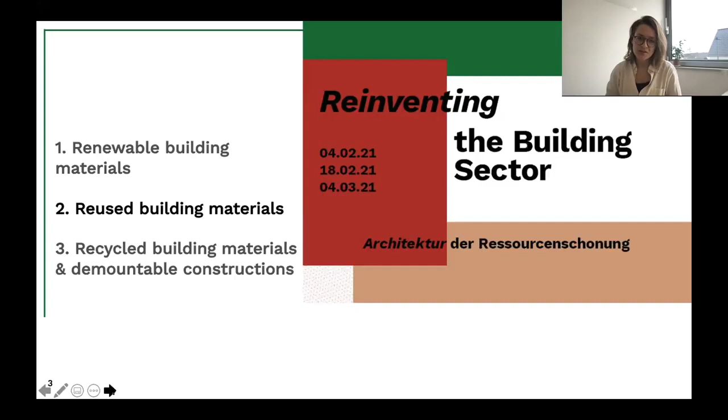In our last webinar two weeks ago, we focused on the topic of renewable building materials. Today we will switch to another, though equally important focus: the topic of circular economy and the reuse of building materials. Our built environment is increasingly seen as a source of secondary raw materials, which can be reused and then bring to life new constructions. In this sphere there is great potential which can be used. In our webinar today, we will learn about three buildings whose planners took note of this potential and consequently put it into practice.

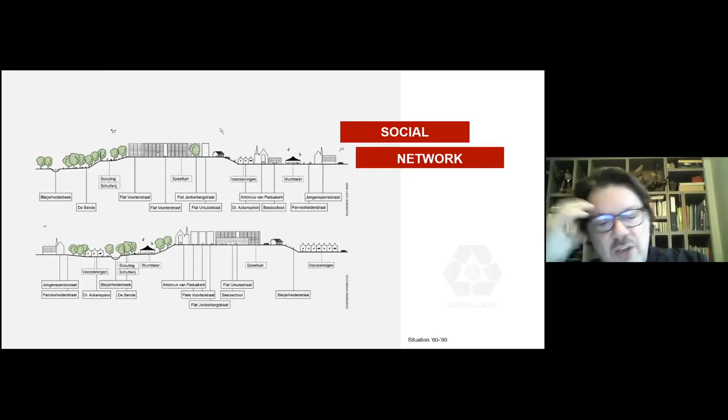After that, several social changes took place. Families got smaller, there were increasing single parents, and a lot of unemployment. The practice of social housing changed and residents felt less involved. The social networks and amenities disappeared over time.

In addition, the architectural condition of the flats deteriorated considerably. Concrete parts were falling off due to the rusty reinforcement, and the galleries and balconies on the flats had to be propped up at some point. The decision was taken to demolish 4 flats, counting 100 apartments each. This was a responsible choice, partly due to the fact that there was no population growth in Kerkrade anymore. For the first time, there was serious demographic shrinkage, and therefore homes had to be withdrawn from the market.

The first flat was demolished with the aim of building new but much fewer houses. This stirred emotions among the residents, who felt very connected to the flats. It became clear that the project needed to be handled more carefully. Perhaps it was better to find out which values could be retained.

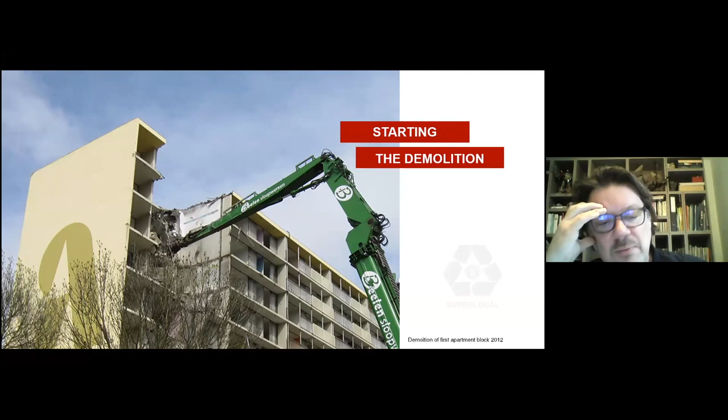The social networks that still exist, for example, are very valuable. How could this be maintained? There was an ambition to recycle as many existing local values as possible, including materials. And so the title for the project was born: Superlocal.

Mauer United Architects devised a circular process triangle for the Superlocal project based on multi-annual phasing, with the initiative in 2014 and planned completion in 2021. Instead of a fast, more, and global approach, we chose a slow, less, and local philosophy.

Here you can see the different phases of the project, and we are now in the phase of creation, close to completion. The year 2021 is the presentation year of the Internationale Bauausstellung Parkstad Limburg, and Superlocal was submitted as a project and eventually became a key project within the IBA.

We started the project by making a thorough, precise inventory of all the values in the area. The former and partly remaining residents were interviewed. This allowed us to put together an evaluation of the archetype gallery flat in use during the period from 1968 to 2018. But many other indexations were also made, such as the construction materials, landscape, floor plans, and more.

All these findings have had substantial influence in developing the new plans. In this way, the modernist archetype has been evaluated from the inside out. The findings were all summarized in the so-called neighbors book entitled 'Iedereen voelt zich daar thuis,' which is Bleijerheide dialect for 'everyone felt at home there.'

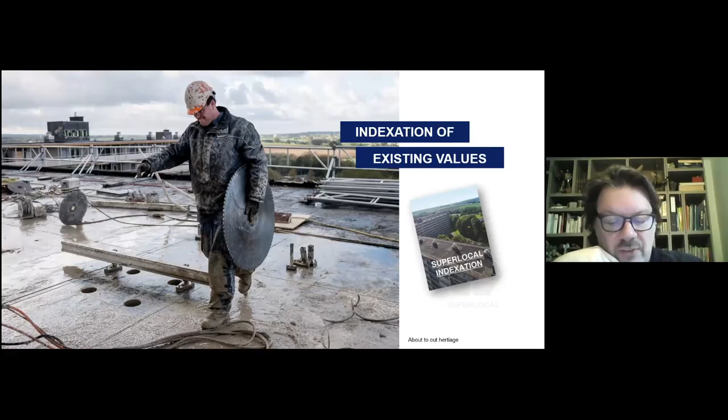The superlocal process was set up to conduct experiments in the fields of circular building. For example, concrete elements from the existing flat were sawn and relocated to investigate whether they could be reused. The demolition firm went so far as to cut out entire building blocks with walls and floors and hoist them with a crane out of the existing flat. This was actually revolutionary for construction practice.

As an experiment, a complete house was built from the harvested materials. The intention was to use only recycled elements from the flat. No new elements were allowed to be added. The aim of the experiment was to find out what problems would be encountered. And there were many, particularly in the area of regulation rules.

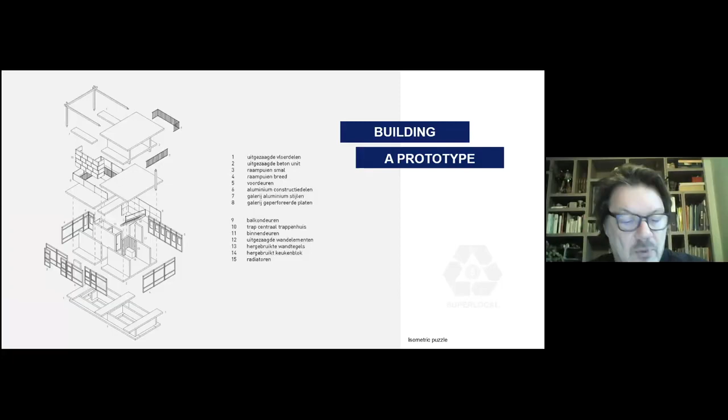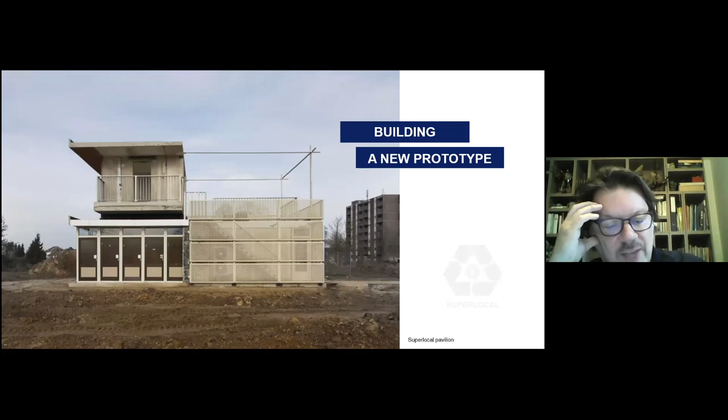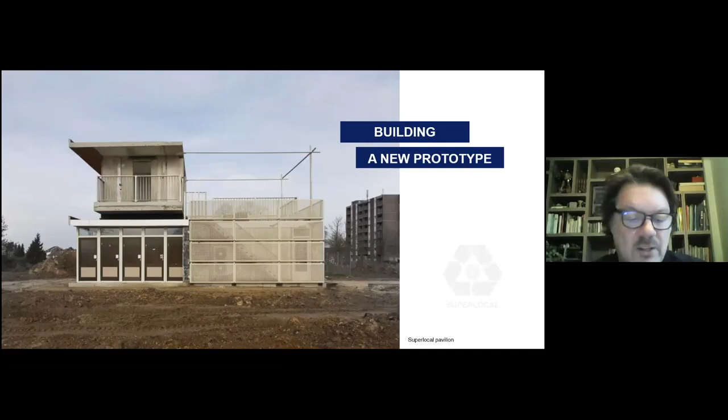It became also clear that in subsequent circular buildings, in the field of installations, insulation, and finishing materials, new elements will eventually have to be added. Today, the experimental building serves as an information pavilion for the project. The unique approach of superlocal was awarded the Dutch Building Prize already in 2019.

In the meantime, the demolition firm has managed to regrind the concrete that is released from the demolition. This results in new mining hills on the demolition and construction site. The material is extracted from the existing flats. The concrete is mixed on site and used for construction of new infrastructure and homes.

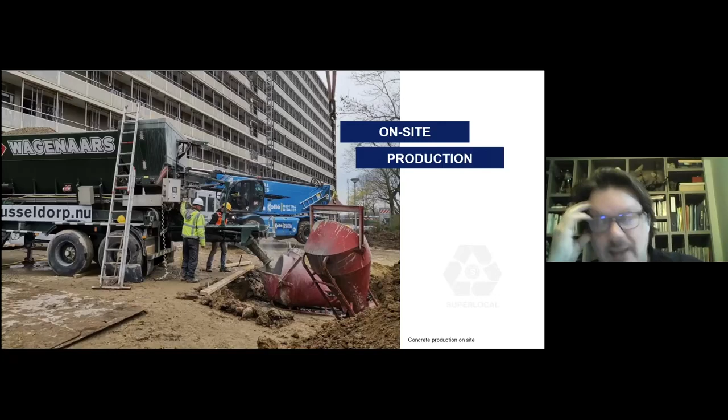Kerkrade is pioneering here again as before. From the first coal mine in Europe, a long way has been traveled towards the first recycling concrete mine, an important step for the future.

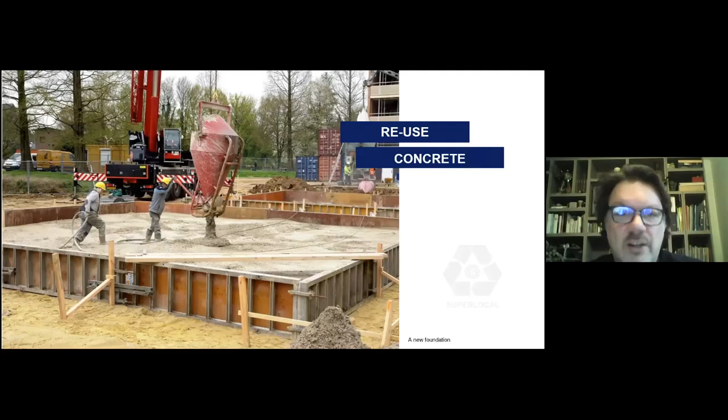Different experimental building sites attract many visitors to the superlocal area. You can see some examples. There were a lot of gatherings at the Info Pavilion and also on the different demolition phases.

All the knowledge gained from the superlocal project is used to realize new social housing. This is reflected in a new gallery flat on site. The flat has 140 dwellings. Instead of identical dwellings, it has been chosen to integrate different types of housing and amenities, allowing different target groups to be better served and creating a mix of residents.

Different types of durability are also applied in the flat. Half of the flat has not been demolished, but stripped to its concrete structure. The construction is reused and provides the structure for 50 new homes.

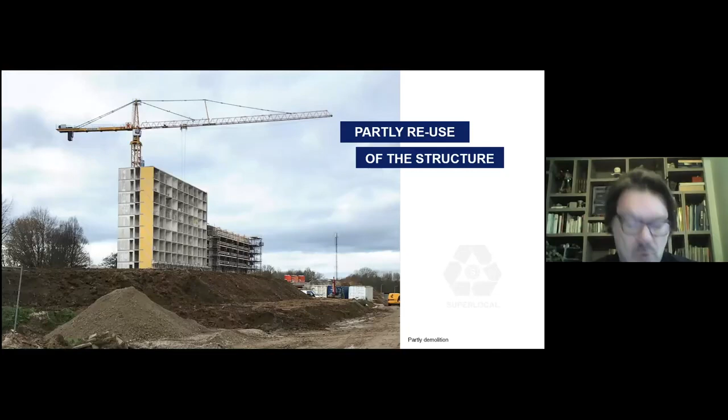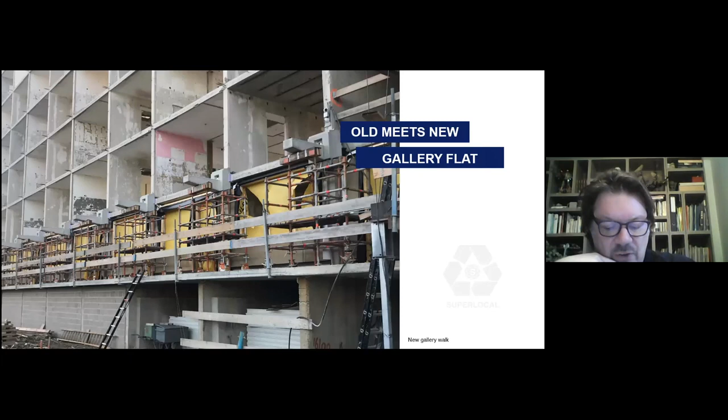Secondly, in the extension of the flat, concrete from the demolished flats was reused according to the principle of regrinding. And thirdly, applying new materials, the architectural details are constructed in such a way that they are reversible. A fine example is the brick facade of the plinth ground floor of the flat, which uses no mortar but is dry stacked.

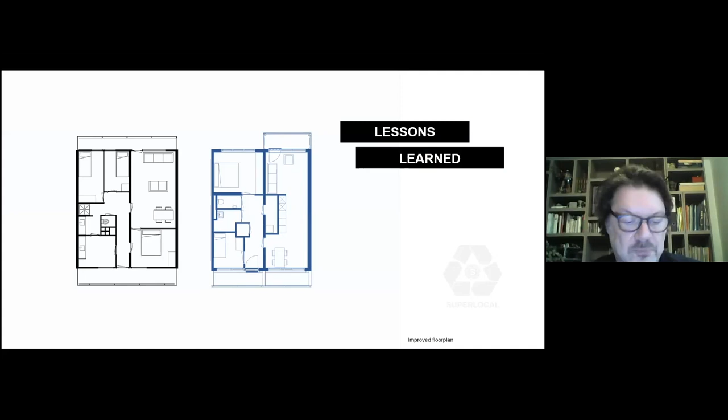We chose to hold on to the building type gallery flat. We improved apartments in the existing structure according to the given input by the former residents from the neighbor's book. As mentioned, we also added new floor plans and types in the new built half of the gallery flat.

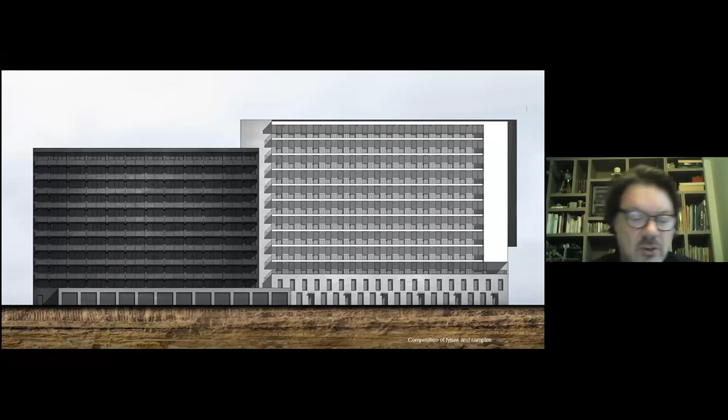The galleries are situated on the north side at the ground floor of the left lower half of the flat. Instead of the usual storage rooms, social functions were planned, a place where inhabitants can meet and come together.

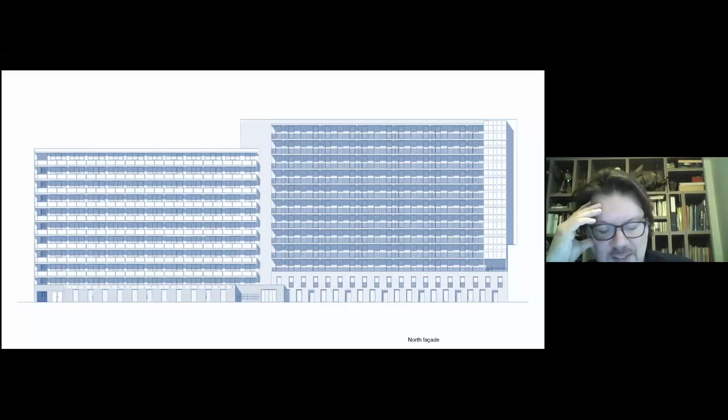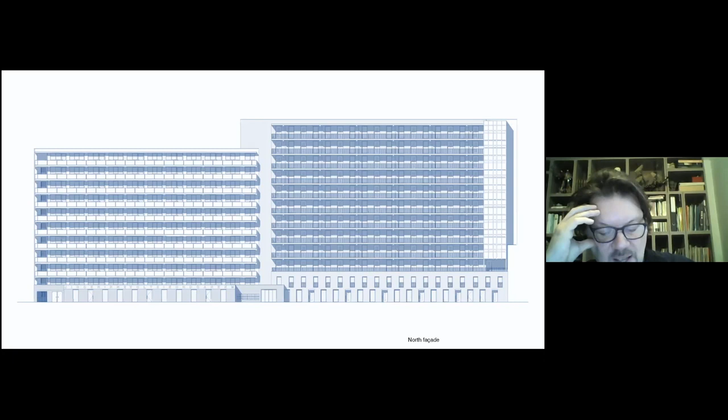This responds to the social change that has been taking place since 1968: fewer families, but more need for social networking. In the plinth of the right half of the flat, terraced houses with own front doors were realized. All this gives the ground floor of the building a more lively character.

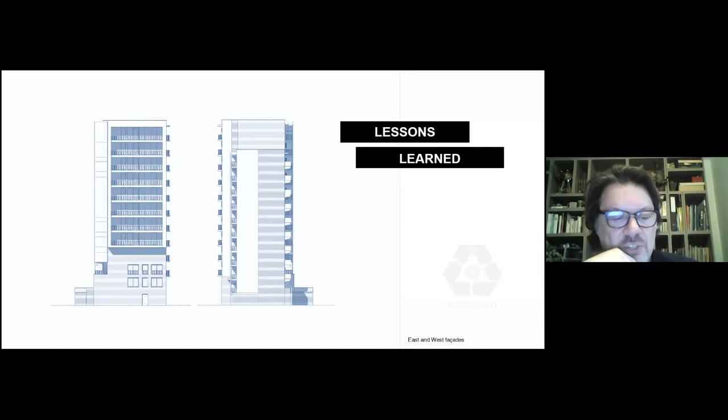On the west, apartments were planned that introduce a whole new view towards the municipalities of Heerlen and Landgraaf. With its height, concept and position, the building forms a new icon for the Parkstad-Limburg region. Here you see some important buildings of Kerkrade, and the superlocal flat is just a new icon in the row.

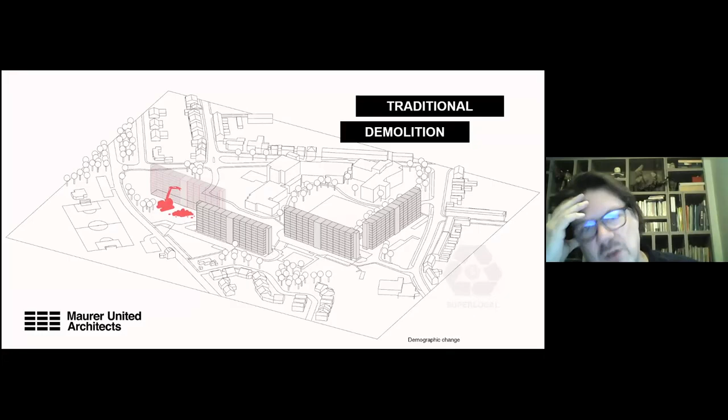I want to end this presentation by summarizing the superlocal project in 5 steps. At first, the first apartment block was demolished in a traditional way, and we found out that this is not the right way to do this, because we want to get more the involvement of the former residents in the project.

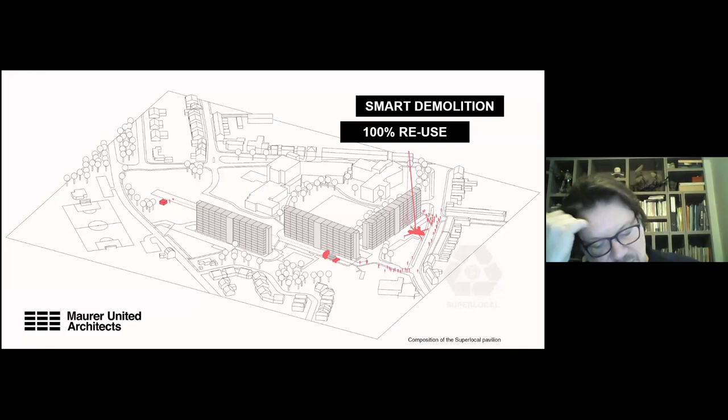So the second apartment block was demolished in an innovative and daring way. The cut-out segments were moved to another spot on the superlocal area, and the pavilion of 100% reused materials was realized.

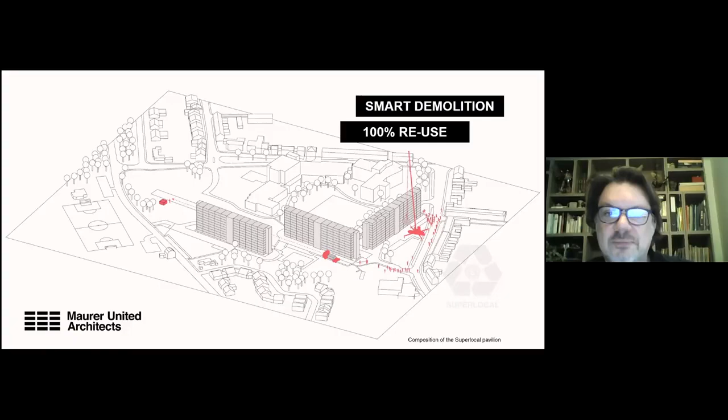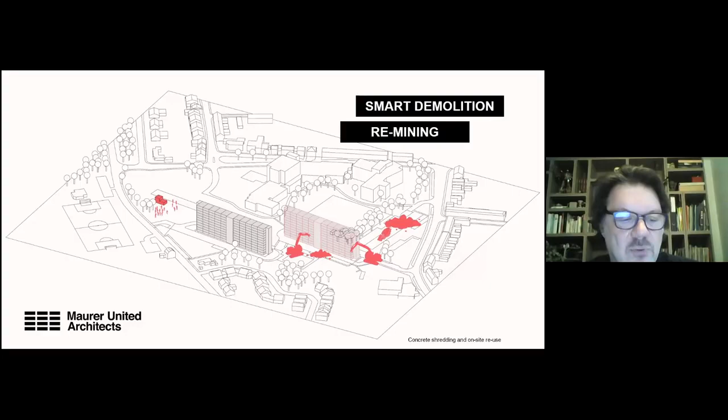The third apartment block was demolished in another way. The concrete was shredded on site for producing new concrete. And then 3 plus 15 new experimental houses were built. Different circular building methods were tested. Half of the fourth apartment block was demolished, the other half was stripped.

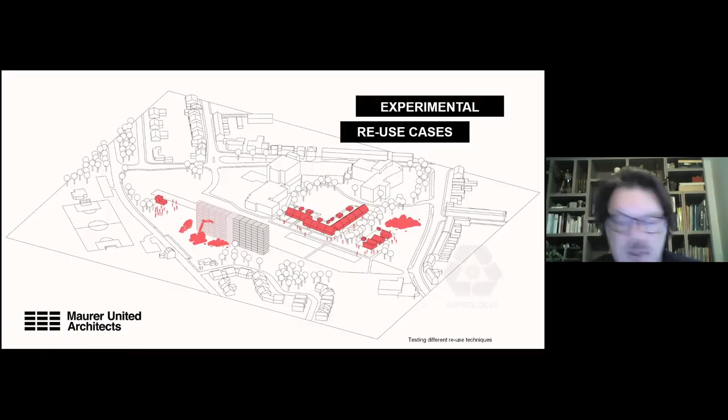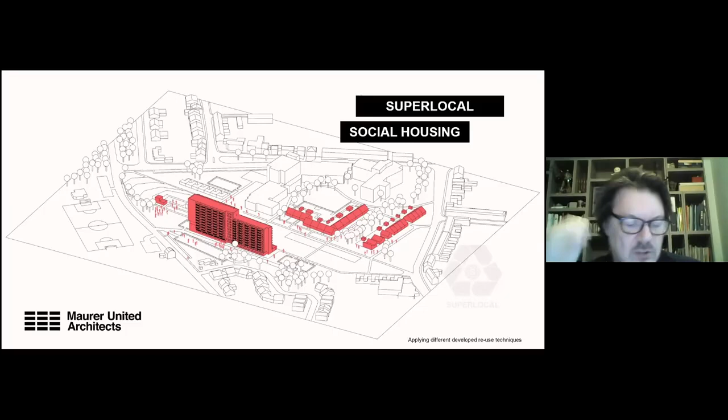The different tested techniques will all be applied in the realization of the redeveloped gallery flat. In total, 400 social housing units were reduced to 130 new housing units. To finish the superlocal project, all the water in the area will be collected, cleaned and reused on site. The United Nations Global Goals 2030 call for local targets.

In Kerkrade, we have tackled this in a superlocal way. With the help of social research and technological innovation, a number of these objectives are met to the maximum. The project is now in the realization phase and will be put into use during the IBA exhibition year 2021. Thank you very much.

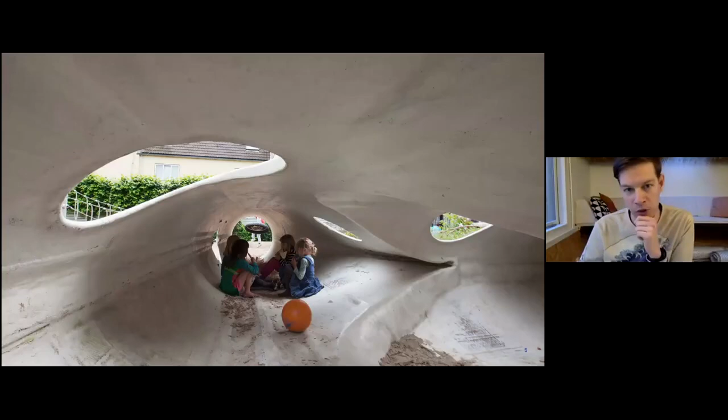Besides our office in Rotterdam and Amsterdam, we have an office in Beijing, China, and one of the founders, Césare Peeren, started Superuse on site to work on projects in close collaboration with the client. At Superuse, we design and develop on available surplus, reusable materials and waste. Superuse builds and designs innovative, aesthetic and inspiring environments, buildings and interiors. We create value by creating quality architecture while preventing the destruction of resources.

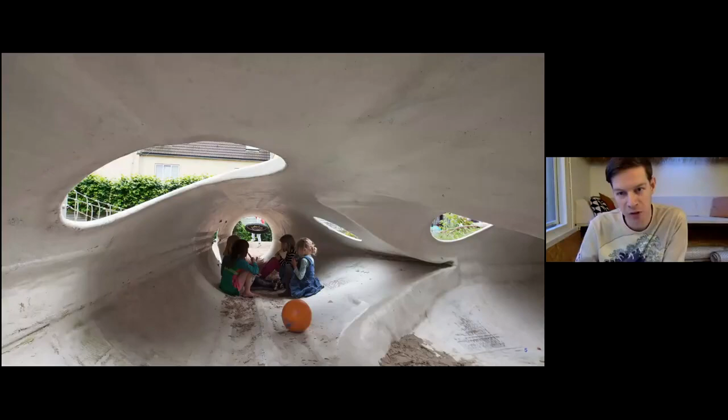Do you have any idea what these kids are playing in? This is the inside of a windmill blade that we used in one of our playgrounds. Our approach results in a smaller footprint compared to a regular building process and shortens and optimizes the flow in material cycles. In this case, carbon emissions are reduced by more than 90%. The picture was taken inside the long blade in a playground in Rotterdam, made out of 5 rotor blades.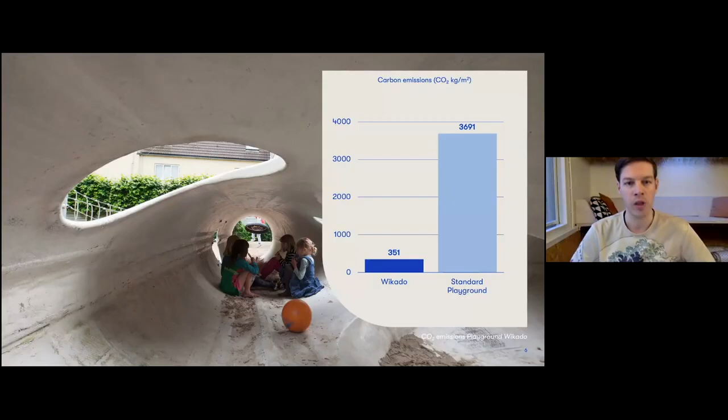I'm not going to elaborate on this, maybe another time. Today I will show our philosophy by taking you on a digital field trip to two of our projects located along the German border: Villa Welpeloo in Enschede and Kringloop Zuid in Maastricht. I hope you will be able to visit these buildings soon, but for now I'll take this opportunity to show some things that a physical visit cannot offer.

First of all, Villa Welpeloo, a modern house for an art collecting couple. Villa Welpeloo is located on the north side of Enschede, which is actually the city in which I grew up. The neighborhood where the villa is located was struck by a disaster in 2000 when a fireworks factory exploded. The urban plan of Pi de Bruijn provided space for the old inhabitants, who were mostly working class, but also new plots for people that wanted to build their own house.

The clients acquired one of these sites and approached Jan Jongert of 2012 Architects, now called Superuse, to design a house out of waste materials. This is what you see when you go to the house today. The outside doesn't reveal in any way that roughly 60% of the materials used would have ended up in landfill or incineration plants.

Let's take a closer look at some of these materials. I'll show you where they come from and how they are used to create our kind of architecture. It is a modern house with big glass surfaces. On a sunny day, the inhabitants can close their curtains to prevent the house from heating up too much.

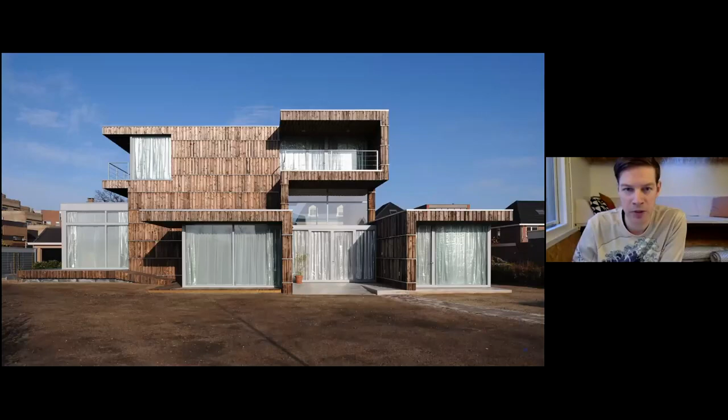But these curtains are not normally found in regular houses. They are more common in glass houses, where they filter the light to protect the plants. The north side of the house is relatively closed to prevent heat loss and contains most of the storage areas, like the garage. On the upper floor, the long closed wall on this side is one big bookshelf.

The top floor has 2 bedrooms, each with a bathroom. Laundry has to be done on the ground floor, so a clothing shaft connects the top floor to the ground floor. You can throw your dirty clothes in here and they end up next to your washing machine. When you take the stair in the morning, you end up in the kitchen and working area. That's where we go now.

All fixed furniture has been custom made and designed mostly out of waste materials. These desks provide plenty of space and the windows facing southwest give daylight for sewing and other hobbies. In the kitchen, the origin of the material is visible. Let's take a closer look.

All wooden cabinets are made from building advertisement boards. This is waterproof multiplex and usually has been standing outside for months, but becomes redundant when a project is finished. We harvested these multiplex sheets and collected them for the furniture maker.

Going down the steps takes you to the living room and gallery. The owners love to support young artists by collecting their work and showing it in their living room, which sometimes doubles as a gallery for semi-private showings. The door that leads to the room in front of you is the guest room, located on the ground floor, and it has its own exit outside.

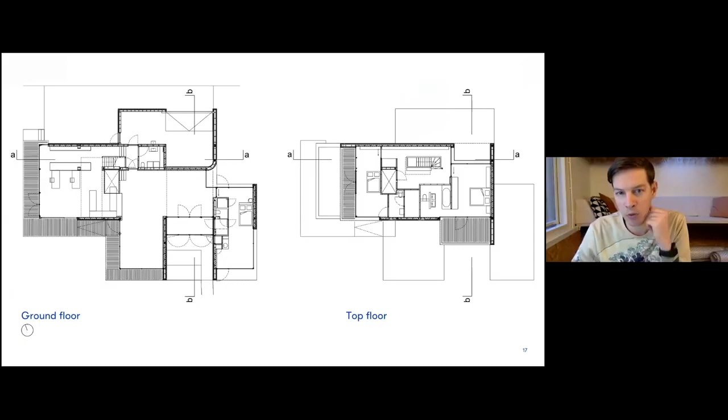Let's take a closer look at the floor plans. You can see the ground floor on the left and the top floor on the right. It shows that all rooms have their own bathroom with toilet and shower, even the guest room. It's perfect for having your children or grandchildren over for a visit. It may seem that the bathrooms are hidden behind the closed facade, but there is some daylight.

As you can see on the right, there is light coming through the facade. Some of the cable reel slats have been left out to add a window for daylight and natural ventilation.

The bathroom next to the master bedroom is also made out of waste materials. It looks a little like black natural stone, but actually it is a panel made from plastic packaging by Smile Plastics. This pattern is called charcoal.

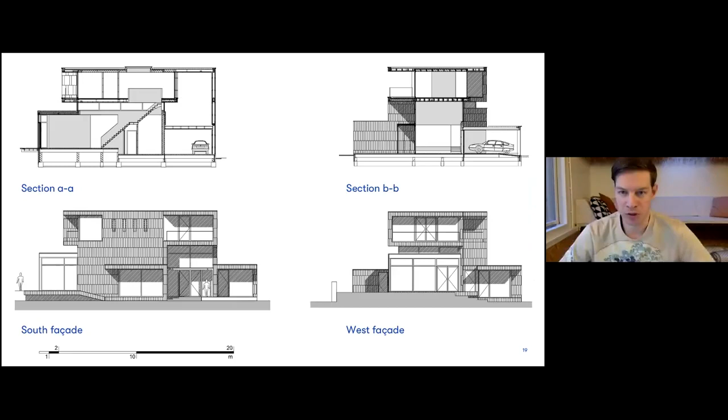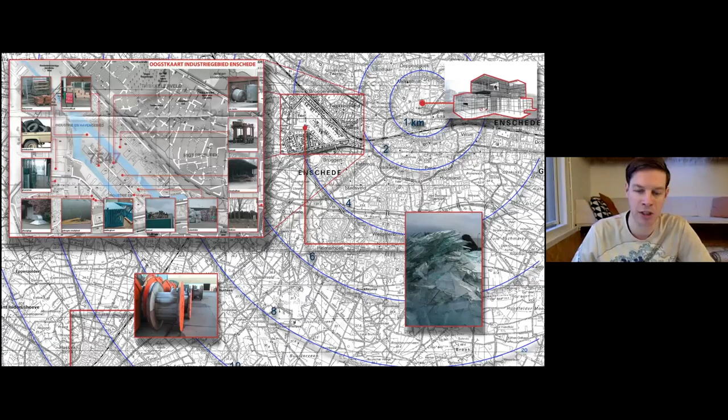They provided all the wood for the facade cladding. The core of the cable reel has been harvested, while the wheels stay behind at the source as waste. They are usually too damaged in the process.

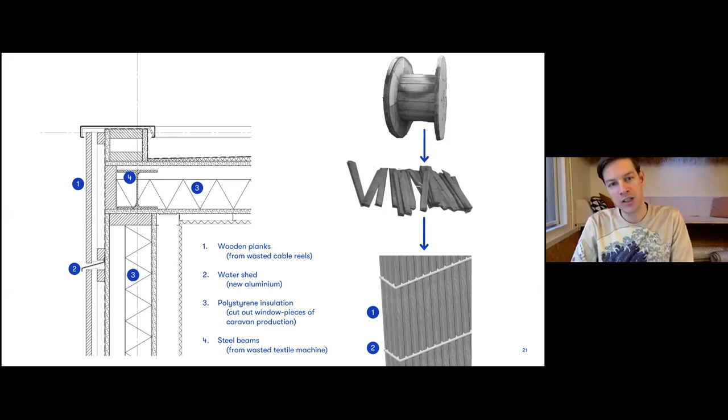The slats of the core are treated to increase the lifespan of the spruce. This is done with a process called Platonizing, where the wood is heated up to 170 degrees Celsius to remove most of the liquids. Afterwards, it has to dry carefully before receiving another treatment that is similar to baking.

In the detailing, we defined clear volumes where the cladding is going around all surfaces, using the cable reels that we found. Using this wood, in comparison to new wood, saved over 90% on carbon emissions for the cladding.

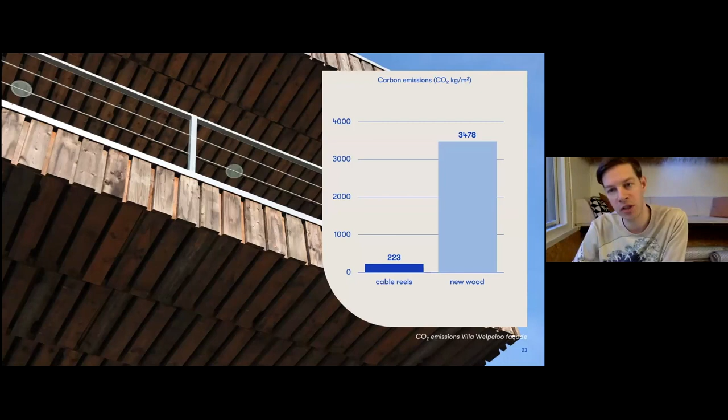For the steel structure, we harvested an old textile machine. Enschede used to have a big textile industry until the 1970s. When the factories closed and production moved to other countries, the machines ended up at scrap iron companies.

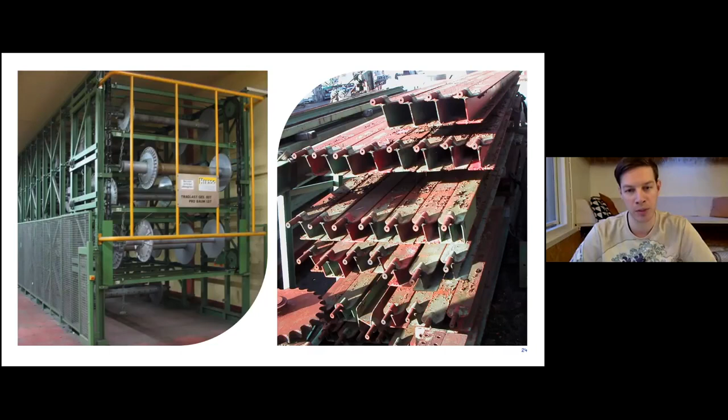We managed to find one of these machines and have been able to make over 90% of the steel structure out of this machine. It's an interesting fact that in this area used to be a textile factory, and that after almost half a century, remnants of that industrial past end up in a private house like this.

In the finished building, most of that history has been hidden by insulation, cladding and wall finishes, but the bracing is still visible in the finished house. As you can see here, it has been painted silver to illustrate the rich history that is behind the structure.

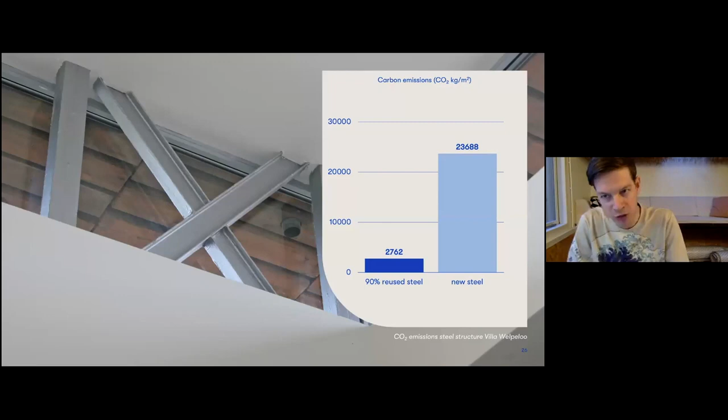Reusing the steel structure saved almost 90% on carbon emissions compared to a new structure.

I'd like to show you a 2-minute video that Al Jazeera made in 2012, interviewing the owners of the house.

2012's most ambitious project to date is the Villa Welpeloo, a temple to super use and the first project of its kind. But having a home built almost entirely out of waste didn't faze the clients. Because they were very serious architects, and I thought there should come something beautiful out of it.

The work of the carpenter, this wood, is all reused. Colorful - so what, billboards that you would see just on the side of the road? The whole house is made from an iron construction, and these are parts of an old textile machine. Earlier, this area was famous for its textiles, fabrics. So a lot of textile machines are still there unused. And they make it from the cable spools.

Now your neighbors, they're not talking? Did you see her? She lives in a house made out of rubbish. Oh, my goodness. I'm proud of it.

There must have been some problems along the way when you're building a house out of waste materials. Of course there were some problems. The first day, let me be honest, the first day I came in the house, I thought, why didn't they paint this side from the cupboards? They see that it is renewed. They should have painted it. Oh, from the billboard. Yeah, from the billboards. And now I'm so happy that you see the real billboards.

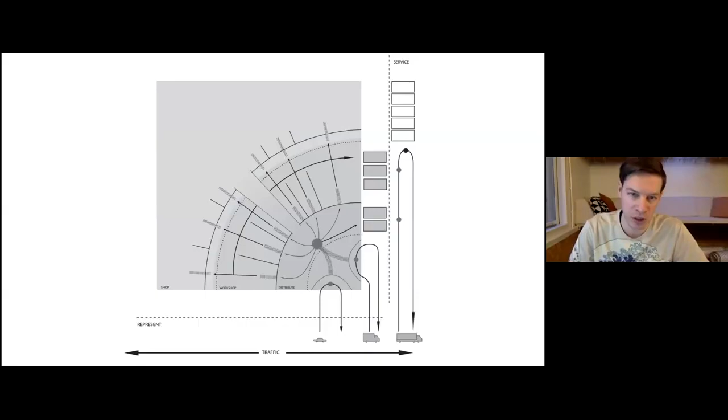The concept we made was a gradual transition of services inside the store. In one corner, the goods are dropped and distributed to several workshops. In the workshop, a selection is made of which clothes are shop-worthy and what goes to textile recycling. The same goes for furniture, appliances, and so forth. Finally, the inspected items are priced and end up in the shop.

What we've finally been able to make functions in the same way, although it's a bit more modest in its graphic language. The building itself is a pretty simple rectangular box. In the front is plenty of parking space, and the bottom right corner with the rotor blade is the place where people can drop off their second-hand goods.

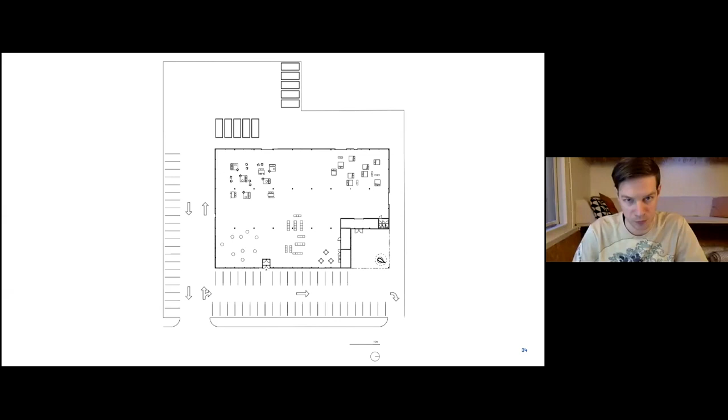As you can see here, most of the front facade is glazed. Visitors arrive at the entrance in the middle, marked by the tip of the rotor blade that shows opening hours and such. This facade faces east and allows the morning sun to enter deep into the building to heat the inside air a little.

The south side is also pretty open, while the north and west sides are more closed. The back of the terrain has containers for the goods that don't make it to the shop and become waste. In developing the building, we used a harvest map to gather the materials we needed.

While the structure is a simple steel structure, designed for disassembly, the materials for the facades are second-hand. After Villa Welpeloo, we developed the harvest map into an online platform accessible to everyone. It's a marketplace for professional upcyclers. Recently we transferred ownership of the platform to New Horizon, who have urban mining as their core business. We still use the platform while we focus more on our core business of architecture.

Let's take a closer look at the material we used in Kringloop Zuid. We came across these metal profile sheets that are common in business districts like the one Kringloop Zuid is located in. The factory usually produces more of one color than a buyer needs, so this overproduction can be up to 4,000 square meters per month, which provided us with the ability to select what would be perfect for us.

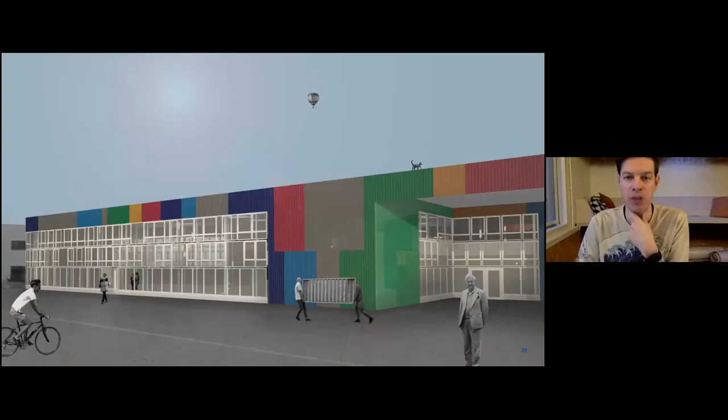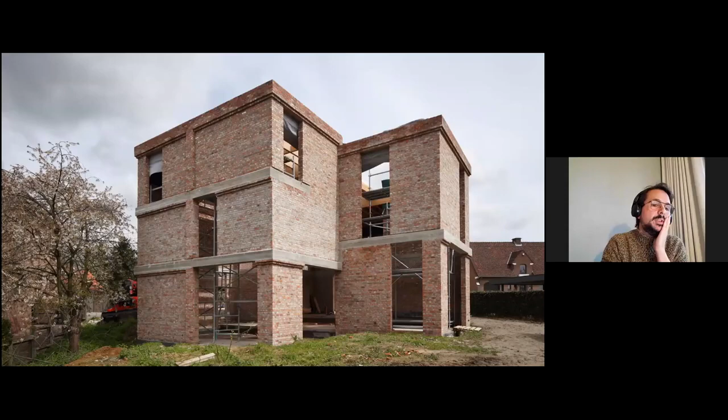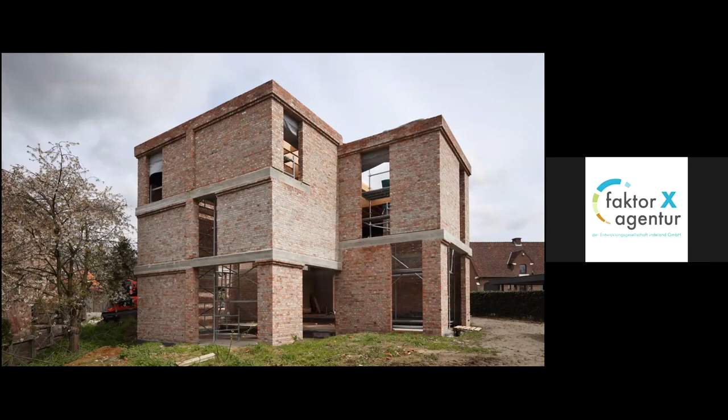My name is Lieve Nys, and I'm here to share with you some experiences with the use of reclaimed building materials by means of our DNA House, which was completed 8 years ago already in 2013. The fact that we are still talking about this house today, I believe, is somehow a stimulus to keep pioneering, but it also shows that architecture is a slow medium and that producing knowledge through practice takes time anyhow. I will also try to situate the importance of this DNA House for our approach on circular construction, which is of course about more than reusing bricks.

Blaaf is turning 18 this year, so we will finally be grown-ups. Last year's Flanders Architectural Yearbook featured Blaaf in an article called The Researching Practice, which is a title with a double meaning: the searching practice, as in how we have always asked ourselves what our role as architects for society could be, and the researching practice, as in how we have always combined our engagement with intuition and research as the basic information system for our designs. Our research so far being mainly practice and education based.

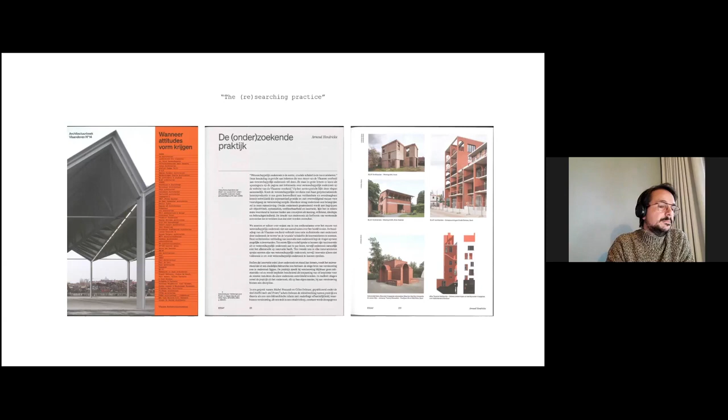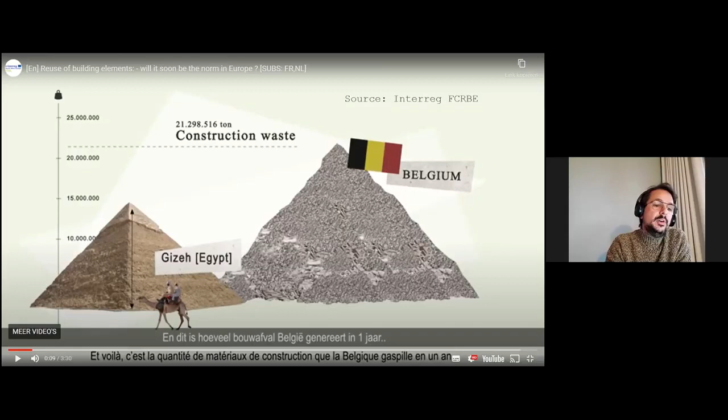Construction waste is an important urgency in Belgium as much as in any other country. This is a screenshot from a video by the Interreg program called Facilitating the Circulation of Reclaimed Building Elements, based on research by, among others, the Brussels-based office Rotor. It states that Belgium produces over 21 million tons of construction waste each year, a number which is unfortunately still growing. It also states that in history, the economic feasibility of internalizing the cost of reclaiming materials has always been evident.

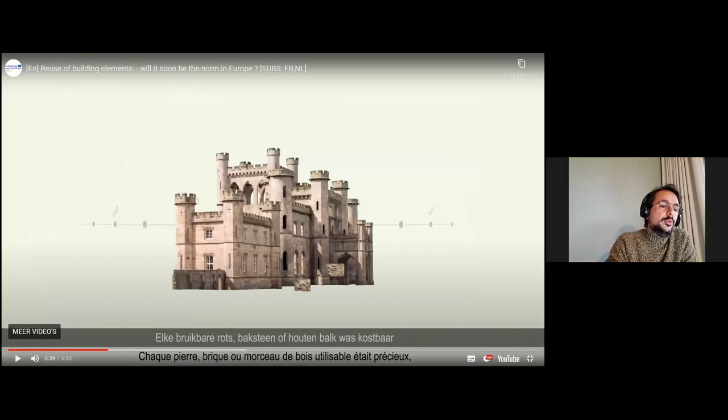It is only since the second half of the 20th century that we have started to grow bad habits. The growth of global consumerism and the shift from expensive materials and cheap labor to cheap materials and expensive labor have somehow led to the externalization of both the impact and the cost of materials and waste. Therefore, the importance of the life cycle analysis approach of construction materials is that it maps both internal and external costs and impact of construction materials, the so-called shadow price. In the lowlands, the Dutch NIBE classification of materials has been a forerunner for many years. Flanders has only recently developed a similar tool called Totem, which is currently being implemented.

If we look at facade brick, according to NIBE, it is class 1C. To give you an idea, in comparison to that, facade cladding in FSC certified tropical wood, fiber cement, or metal are all in class 3 or 4.

The main reason for the excellent performance of brick is, of course, the lifespan or durability of the material, but also in terms of the LCA shadow price. It's interesting to notice that brick has low water impact, low resource impact, low land use impact, low toxicity, low maintenance impact, and low waste impact. The downsides of brick are mainly situated in the production process, while the baking process itself is energy consuming, and it stands for 50% of the CO2 release and for 80% of the total LCA shadow price.

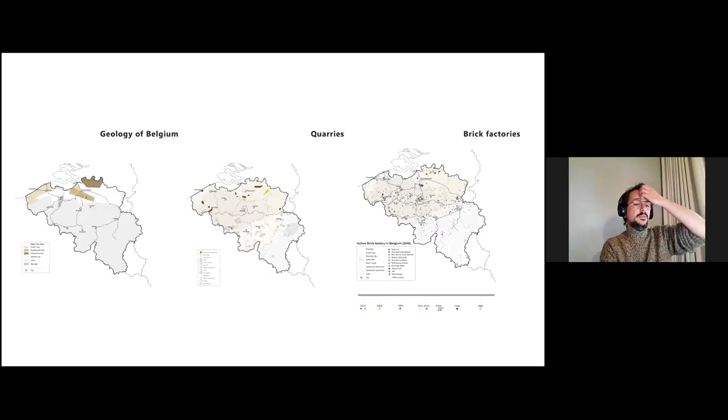As you may know, Belgium, Flanders in particular, is a brick region. On the first map, you can see the geological areas that provide the resources. The second map shows all different excavation activities on the territory. Very often clay is the byproduct of other excavations. And the third map shows the location of brick factories through time. Flanders has an economy in brick production since the 13th century, in which our river network played an important role.

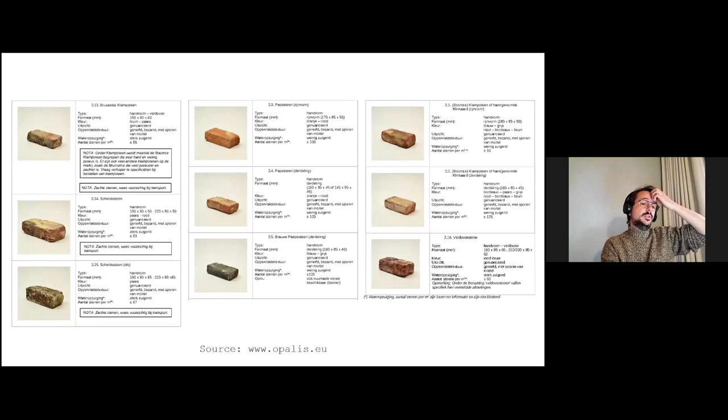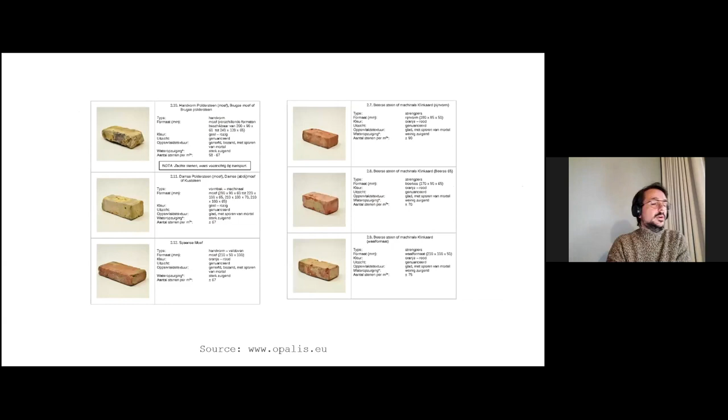This is an overview of available reclaimed bricks on the market today. You can see a variety in modules and textures depending on the production process, and different colors, mainly yellow and red, because they are made out of local clay depending on the type of clay. All these bricks were reclaimed from deconstruction works and cleaned by hand.

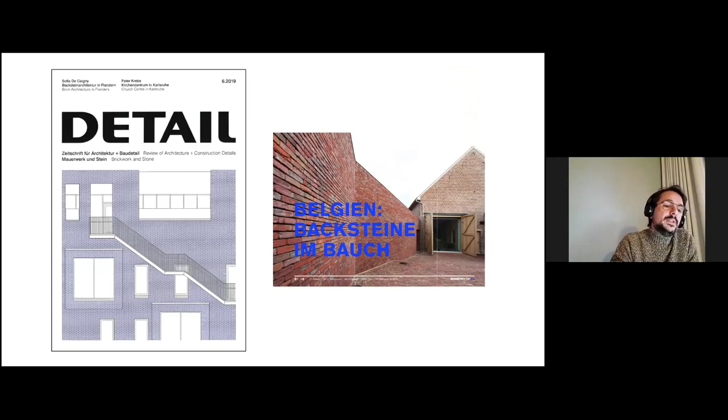Movements like these have contributed to the installation of the generic image of the brick fermette house in our built environment. It is the omnipresence of brick and the way it is intertwined with our fiscality, economy, and building culture that also contribute to the image of contemporary brick architecture as a product of poetics and craftsmanship. Even internationally, German magazines like Detail and Baunetzwoche, for instance, have recently elaborated on Belgian brick architecture and Baukultur.

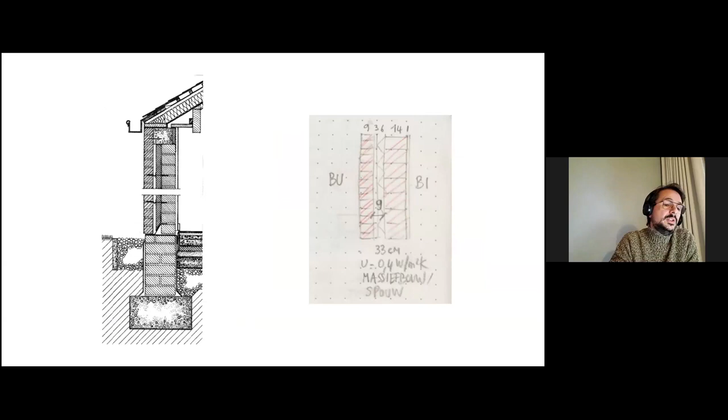10 years ago, in 2010, it was still common practice to build 33 centimeter thick cavity wall constructions with 6 centimeters of insulation and 3 centimeters of ventilated cavity space. These were interesting times because since 2006 we had EPB, energy performance regulations, and at BLAF we were already engaged in studying the passive house concept.

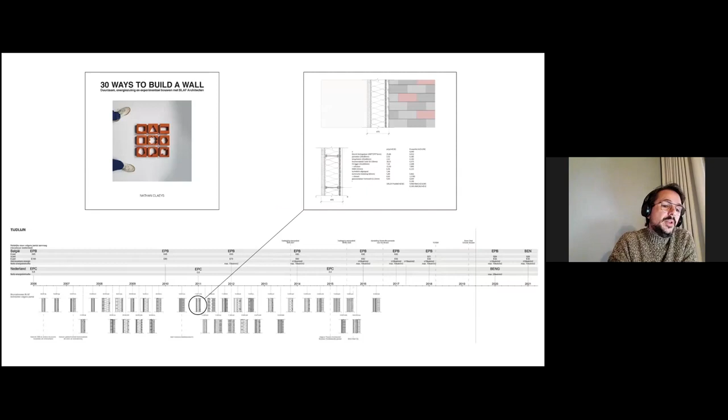Here you can see a timeline from the master thesis, 30 Ways to Build a Wall, which gives a chronological overview of 30 different wall compositions that BLAF built in private houses between 2006 and 2016, with detailed information about the materials and their performance, but also about the construction cost.

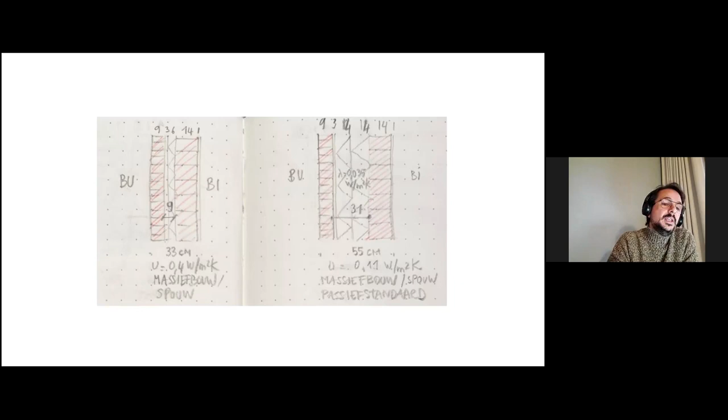So somewhere along the line, we were suddenly confronted with this contradiction. The 2010 cavity wall with a 9 centimeter cavity became a passive house cavity wall with a 31 centimeter cavity space. Now, in the construction of the cavity wall, we are dependent on quite a lot of secondary structural elements to stabilize and carry the outer leaf of the wall.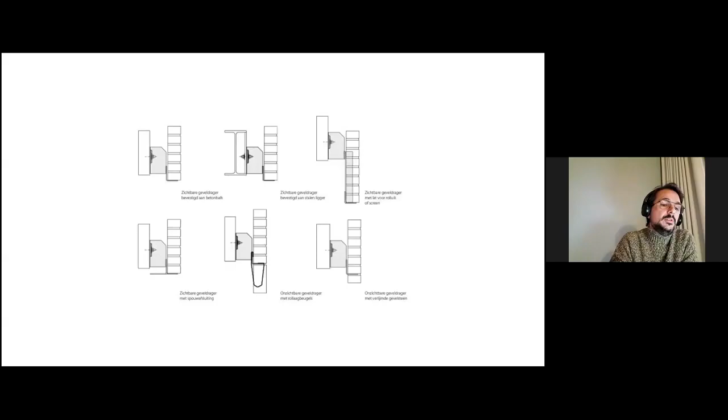Anchors and facade carriers like these simply don't make sense if you have to bridge a 20 to 30 centimeter cavity. Moreover, for sustainability reasons, we were shifting away from rigid petroleum-based insulation panels to softer ecological insulation materials that are unable to take any pressure.

Bridging these large cavity gaps makes construction more expensive, complex, and error-prone. Or try to find an efficient way to make these slabs fit around these anchors.

Maybe you are familiar with Florian Nagler's research, Einfach Bauen at the TU München, that starts from the same observation that building according to contemporary standards has become ridiculously complex and almost impracticable. The logical result of this is that brick is losing ground as a facade material.

This later became evident in 2015 when this book was released. It is a review of 10 years of passive house construction within the Brussels capital region, and it contains only one building with brick facades, which is our DNA house.

So it was our observation that the EPB calibrated legitimizing of the appearance of architecture has big impact on our built environment, as well as on our role as designers. Or to put it in Rem Koolhaas' words, the architect is losing his grip on the facade to more competent disciplines.

What we see is that the industry reacts to this evolution by trying to make brickwork thinner and lighter, so you will either need more anchors to keep the stacked bricks upright, or you glue the material as wallpaper on top of something else.

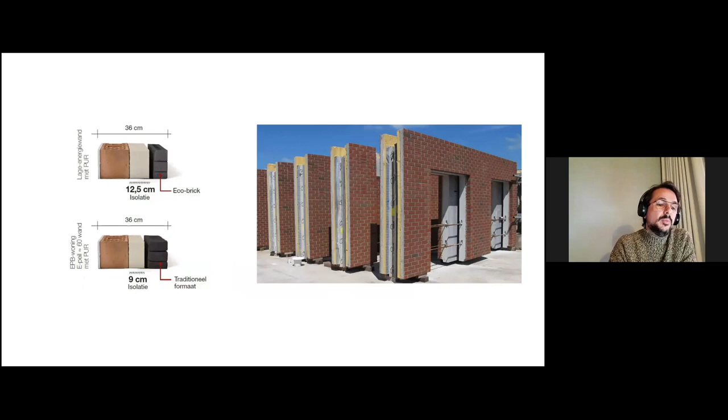For us, this feels like a counterintuitive evolution, not only because we were looking for a more circular approach of the construction than to glue everything together, but also because it takes us away from the basic properties of brick, often referred to as the agency of the material. A brick is a stacking module, but also a pixel in an image, a proportion system, and a representation of continuity, education, and labor.

So this is where the story of the DNA house comes in. Instead of making the brickwork thinner and lighter, we decided to explore the idea of making the brickwork thicker to make it structurally and thermally independent.

Inspiration can, of course, be found in pre-cavity wall constructions, where you see that the shell is highly valued and therefore preserved and stripped down to give it a new life from the inside. Like this image of the St. Elisabeths Hospital renovation in Washington.

What is equally interesting in this example is that the building is so big that the interior space can also be experienced as an exterior urban space. So this approach triggers a lot of design questions.

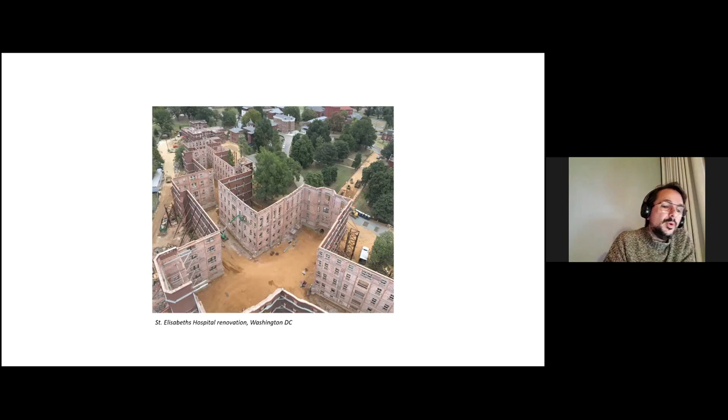The idea for the DNA house was to make a brick shell, a facade, as a long-term construction or a future ruin. Now, first of all, the commission for this house was quite standard, a building plot in the outskirts of Brussels, a home for a family.

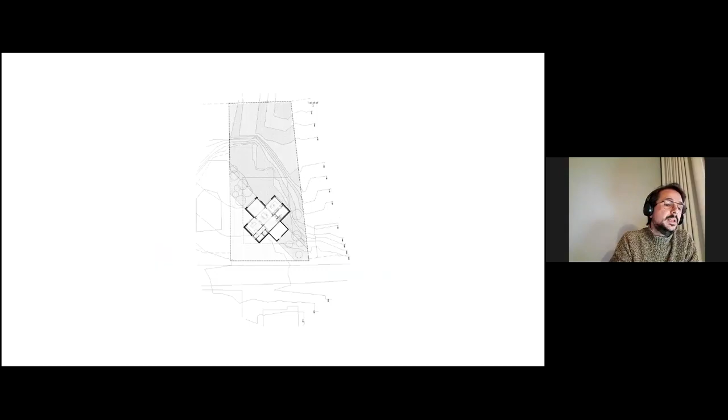The cross shape of the shell enables us to work with the topography, the orientation, and the planning context, and in itself is already quite stable in different directions.

Our experience from renovation projects was that the post-insulation of shells is often problematic and complex because of obstacles like structural embossments on the inside of the wall, or the construction knots where the floors are laid on the load-bearing walls. So to make sure that we would have no obstacles on the inside that would prevent us from post-insulating in an efficient way, we made the shell as flat as possible on the inside.

The shell is constructed in reclaimed machine bricks as a full stone wall construction to make it self-bearing, with a basic cross bond, which consists of alternating layers of stretchers and headers. So the brickwork has the same expression on both faces of the wall, which was important to us because we knew that parts of the shell would stay visible from the interior as we finished the house.

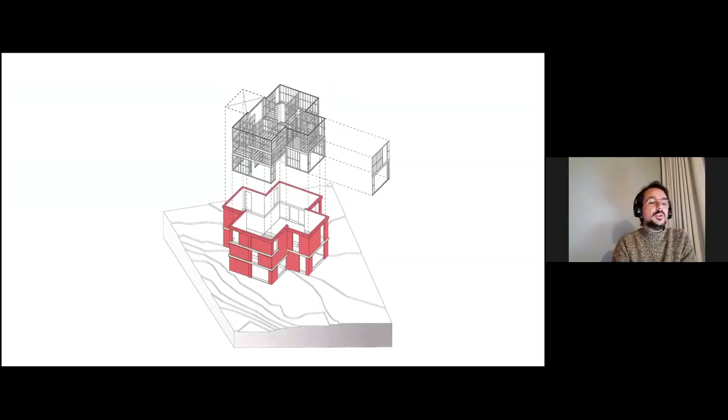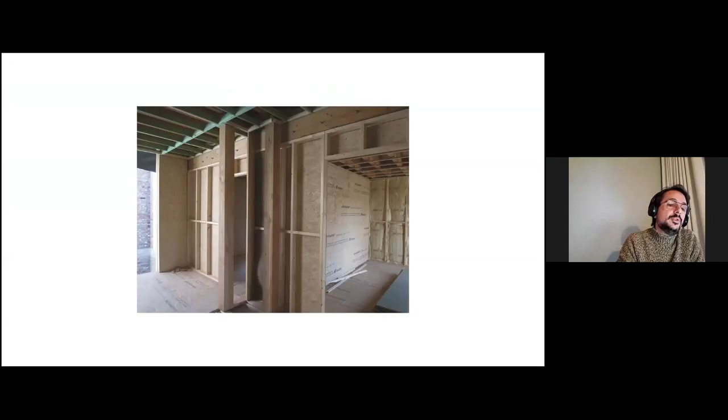This 3D detail section of the construction of the house shows you the whole principle of the construction, with the self-bearing full stone brick wall on the outside, the first layer of semi-rigid insulation perfectly fitting the flat inner surface, and the insulated timber frame behind it. You can also notice that the sections of the timber frame are very limited. This is made possible because the brick shell protects it from the wind forces.

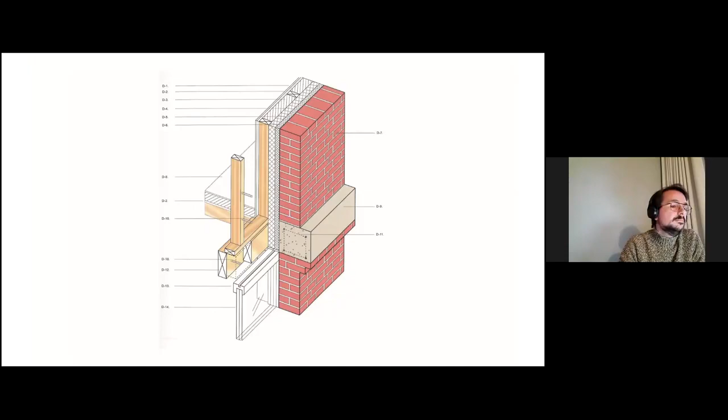So that's the story about the DNA house. What I want to show you next are some slides to give you a quick overview of what the DNA house has instigated in our practice. I will not go into them in detail because each one of these projects would make an extra lecture.

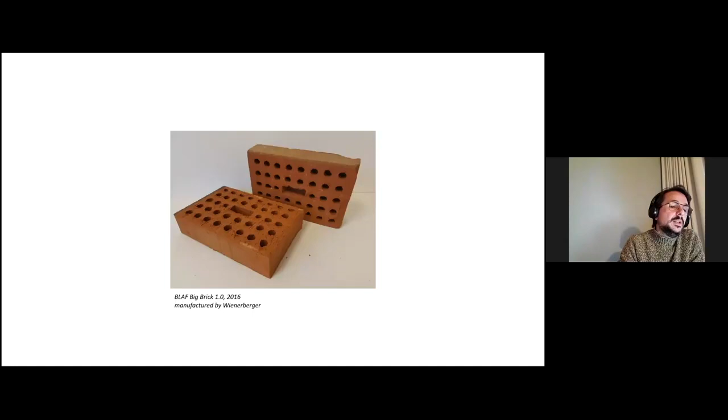We have developed new facade brick products to make self-bearing facade constructions, like we did in the DNA house, in a more economic way. This is called the BLAF Big Brick. The first one was manufactured by Wienerberger for the construction of a series of experimental houses, testing different wall compositions for brick, shell, and timber frame infill constructions.

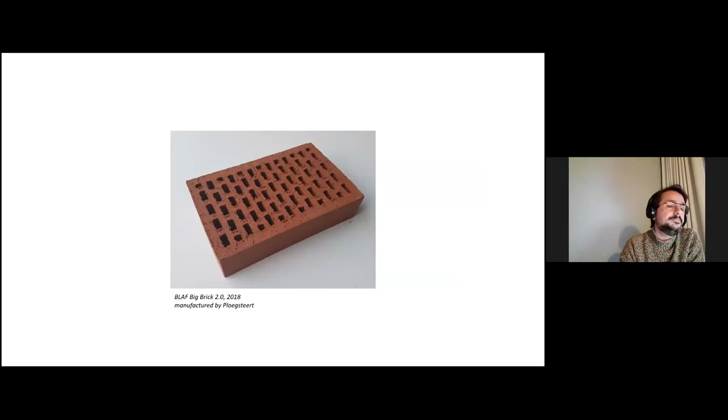The second one was manufactured by Ploegsteert and was developed for a 6-story high self-bearing balcony structure of our project at the Old Docks in Ghent. This is an urban development project, and it also has a 100% circular system for energy, heat, water, and waste, but that's also another lecture.

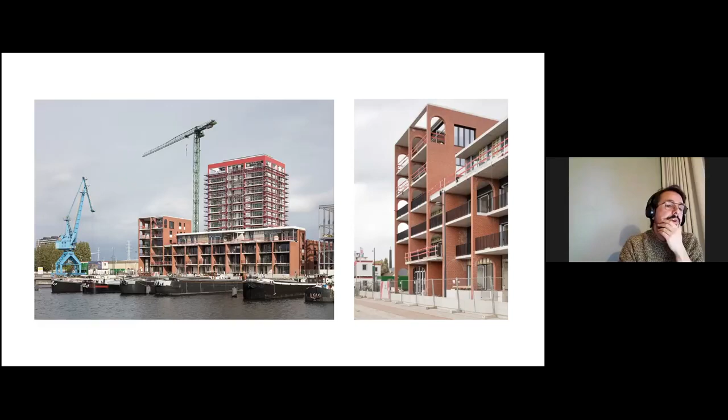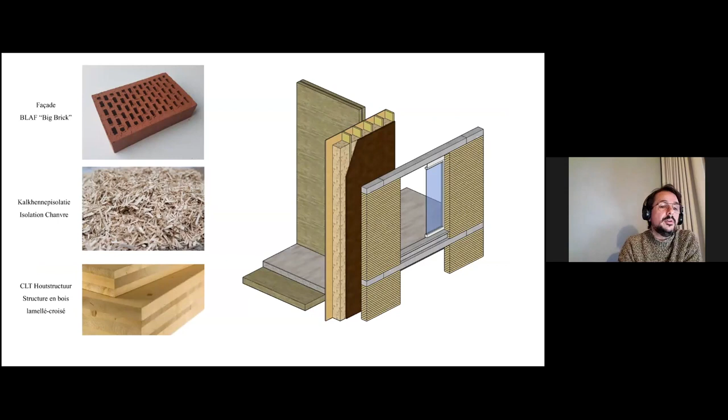The third batch will be manufactured by Ploegsteert for an affordable housing project with 80 apartments in Brussels, where we are now working on the circular construction concept with cross-laminated timber, facade cases filled with hemp insulation, and a 5-story high self-bearing brick facade construction. We will also grow the hemp on site and later reuse it for the production of the insulation material.

So this is for the future. With this, I have reached the end of my presentation. Thank you for listening, and I'm looking forward to your questions and reflections.

Thank you, Lieven. It's actually quite astonishing to realize that the intensive engagement with one single project like the DNA house can lead to these fundamentally new insights concerning construction methods and influence one's whole building practice.